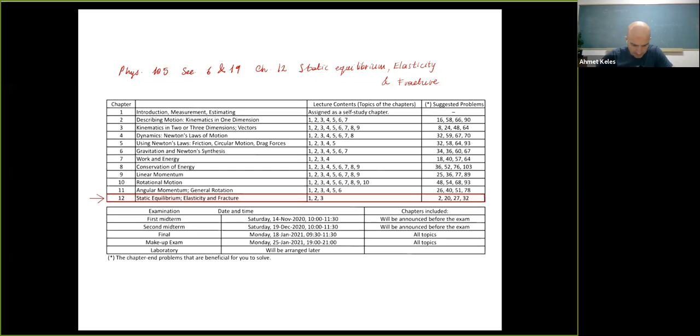First I want to introduce equilibrium, and when I say equilibrium, I mean static equilibrium. For this, we mean an object that is in a certain configuration and stays in that configuration no matter how long time passes. For this kind of static equilibrium, we have two conditions.

The first one is from Newton's laws: the sum of all forces on the body should be zero. Since force is a vector, we need to consider the sum of all forces in vectorial form. If you open this up, each component of the total force should be zero. For example, if you put your book on your table, the total force in any direction should be zero. Obviously there is no force horizontally, but vertically there's gravity, and if the total force is zero, there must be an equal and opposite force to cancel gravity - we know it is the normal force.

The second thing is, this condition itself is not sufficient for static equilibrium. Consider a situation like this: imagine you put your ruler on the table and pull it from opposite ends in opposite directions. It's easy to see the total force in the system is zero, this force cancels that force, but the ruler is not in static equilibrium because it's going to rotate. There is a torque, which brings us to our second condition.

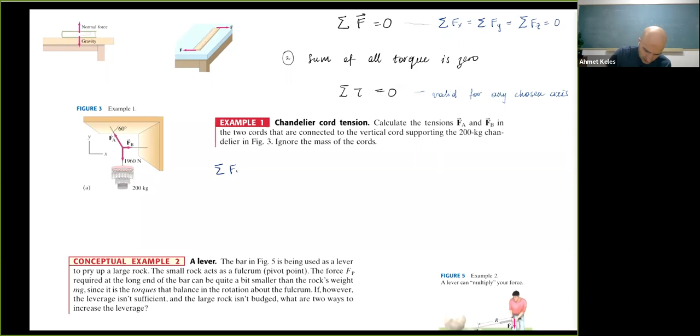The net force should be zero for static equilibrium. The net force in a horizontal direction should be zero, and the net force in horizontal and vertical directions should be zero separately. Let's start with the vertical direction. So the sum over all forces along y should be zero. I can decompose this vector into its components.

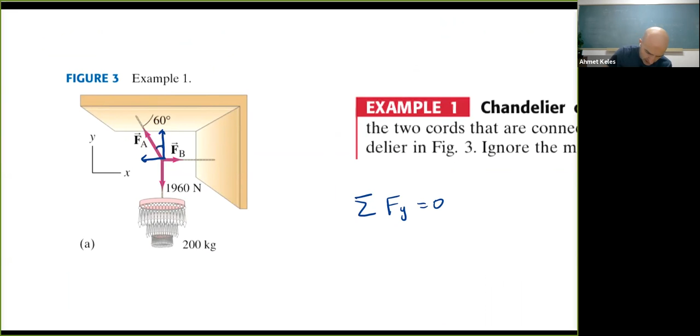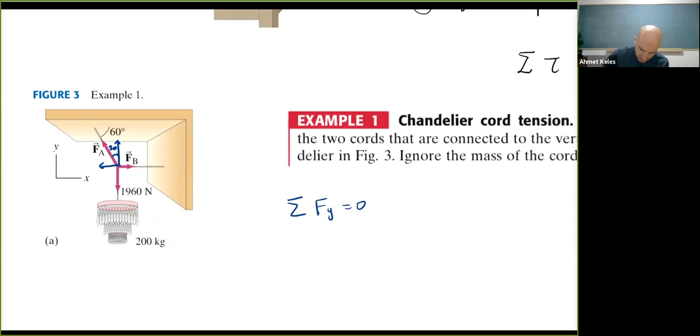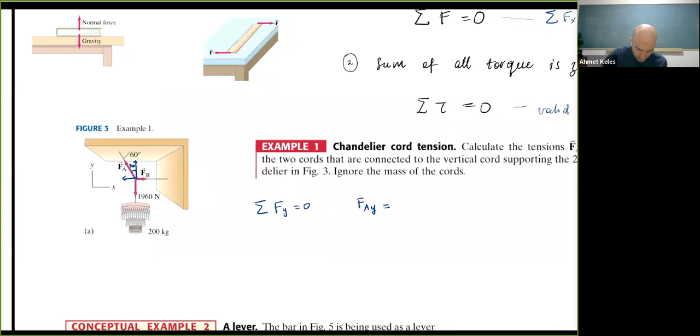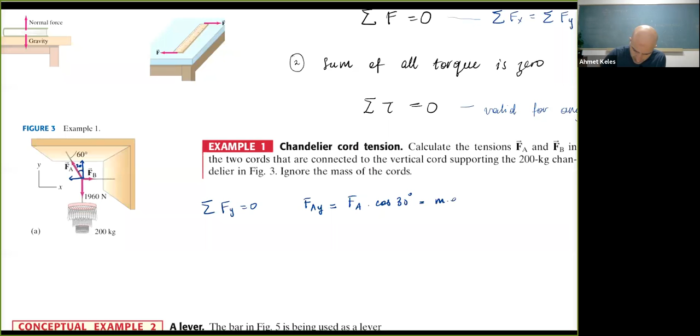This is nicely 30 degrees. From this figure, what I see is that for this to happen, the force FA, its y component, which equals the magnitude of FA times cosine 30 degrees, should be equal to mg. Then FA is equal to mg divided by cosine 30 degrees.

Let's calculate this. 2,263 - yes, I think somebody else got the same thing. 2,263 Newtons.

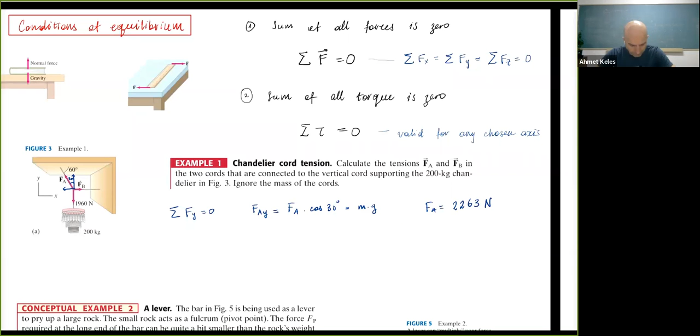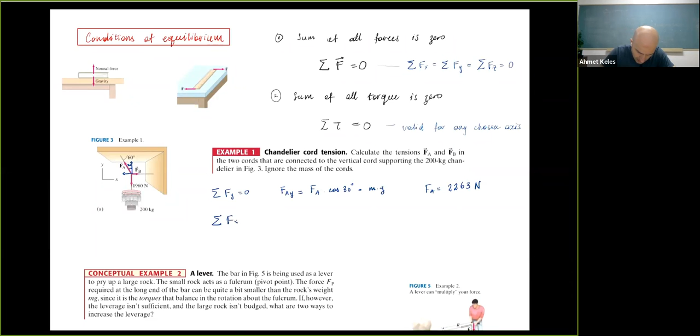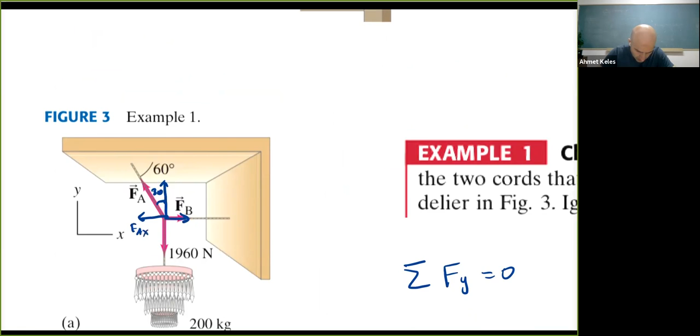Now this is only the first component. We also should do the same thing in the orthogonal direction, so fx should be zero. Along this direction, fb and the x-component of fa are the two forces. So fax should equal fb, which is fa times sine 30. This is a little easier, it's just half of that, which gives fb equal to about 1131.5 Newtons.

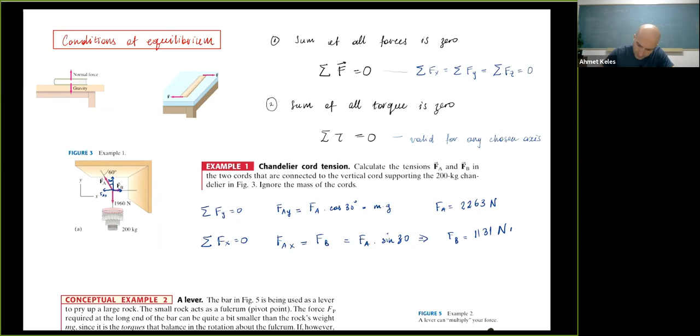Great. So let's talk about another example for the second condition. Here is a conceptual example from your book.

A bar in the figure is being used as a lever to pry up a large rock. The small rock acts as a fulcrum, a pivot point - there's a small rock, you may not be able to see it, but it's there. The force Fp required at the long end of the bar can be quite a bit smaller than the rock's weight, mg, since it is the torques that balance in the rotation about the fulcrum.

If, however, the leverage isn't sufficient and the large rock isn't budged, what are the two ways to increase the leverage? So you want to move this rock, and let's say in this configuration it's not working - what two things can you do? Decreasing R over R, yes. So I think the idea is simple, but let's just go over it: mg times R should be equal to Fp times R.

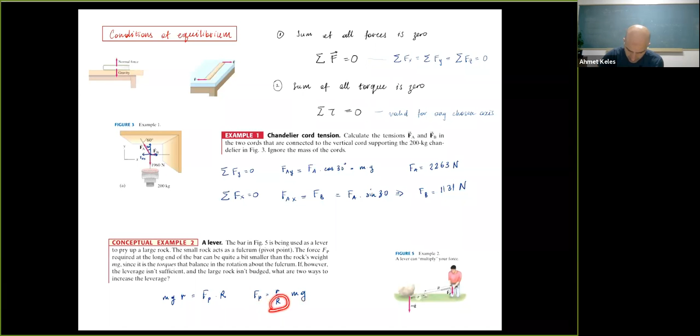You want to have Fp equal to r over R times mg. The idea is you need to decrease this r over R to have sufficient force to move this. One way is to increase R—in the picture they suggest connecting a pipe or some extension so you can increase R, which helps since R is increasing. Or you can decrease r by moving the fulcrum a little toward the big rock, which will also decrease r over R.

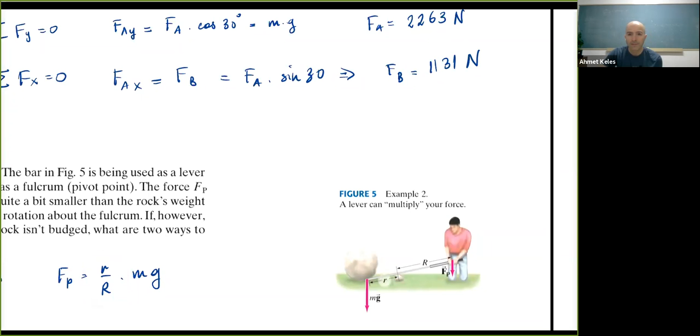Okay, let's move on.

A board of mass 2 kilogram serves as a seesaw for two children, as shown in this figure. Child A has a mass of 30 kilogram and sits 2.5 meters from the pivot point P, and his center of gravity is 2.5 meters from the pivot. At what distance x from the pivot must child B of mass 25 kilogram place herself to balance the seesaw? Assume the board is uniform and centered over the pivot.

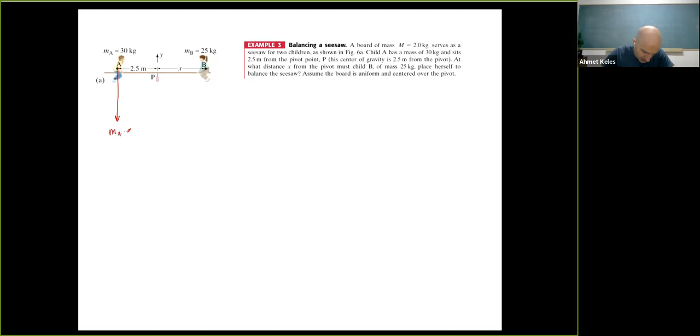So let's identify the forces. There's some force mA times g. There is some force mB times g. And there is some force from the board—let's call this M times G. For balance, there must be no rotation, and I choose my pivot point here.

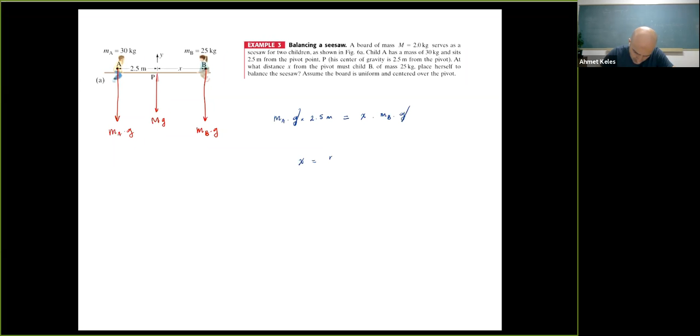So mA times G times 2.5 meters should be equal to X times mB times G. Then X should be equal to—I can cancel the G's—mA over mB times 2.5 meters, which equals about 3.0 meters. Simple.

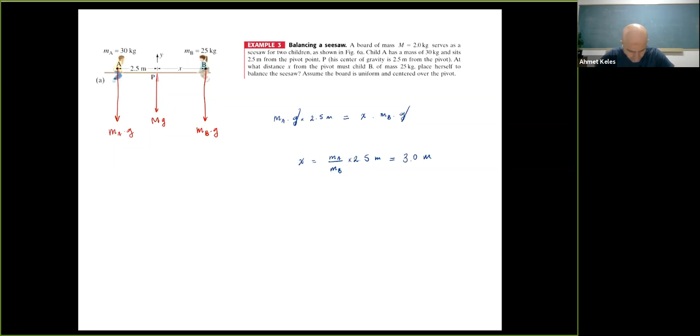Let's continue with another example I made up. Here's a cantilever, a device shown in this figure, with two supporting points here and here, and the center of gravity of this board is here.

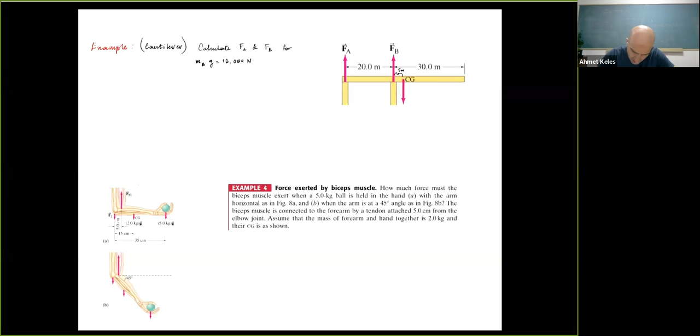The mass, or M board times G, is given to be 12,000 Newton, and we want to calculate FA and FB. The length is like 20, there's a 5 meter here, and this total distance is 30 meters.

We can start off by saying torque must be 0. There are two conditions: one is total force should be 0. Everything is in one direction, only vertical, so I'll just write magnitude.

So FA plus FB should be equal to M board times G.

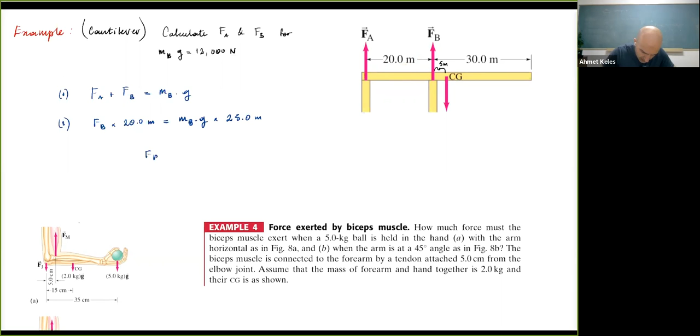The second condition is the total torque should be 0, and I want to choose this point. That means 2 FB times 20.0 meters should be equal to M board times G times, 20 plus this little chunk, which is 25.0 meters. Then FB is equal to, let's calculate, 15,000 Newton.

This is 15,000 Newton. So now I can put this back in the other equation, just plug it in here. So FA is equal to MB times G minus FB, which is equal to minus 3,000 Newton.

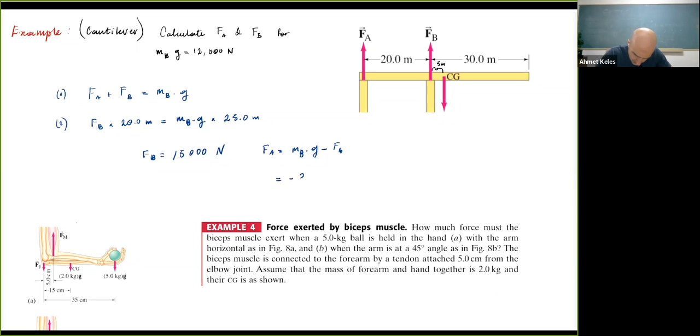Now, I found some minus here—what does this mean? Are we confused by this minus sign? Are we okay with this? Exactly—this just means our assumption about the direction was wrong. So force FA is actually in the opposite direction. From the figure it's not clear, but maybe it's glued, or there's some screw or nail, so the force is just pulling it down, which should be the case. Otherwise this thing would not balance.

So this will be a general thing: in problems concerning static equilibrium, if you find things like this, you just reverse the direction of your force and you're good to go.

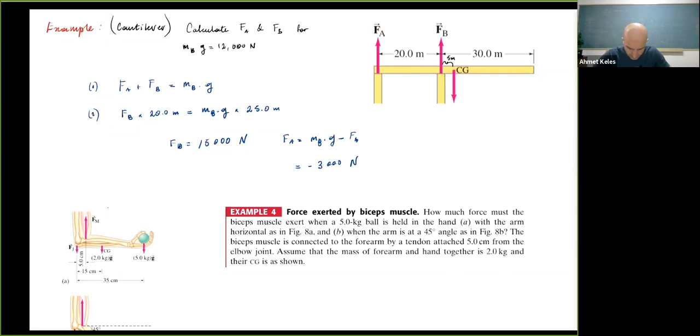Here's another example. How much force must the biceps muscle exert when a 5 kilogram ball is held in the hand, with the arm horizontal as in figure 8A, and when the arm is at a 45-degree angle as in figure 8B? The biceps muscle is connected to the forearm by a tendon attached 5 centimeters from the elbow joint. Assume the mass of the forearm and hand together is 2.0 kg, and their center of gravity is as shown, 15 centimeters away.

I think this is the same type of problem, so I'll go ahead and start. I'll look at the torque with respect to this point. If you draw a line from this point that goes through all the other forces, you can see all forces are perpendicular because the forearm is perpendicular. So let's do this.

Fm times the distance, 5.0 centimeters—I'm choosing centimeters here, so I should be consistent in the rest—minus 2.0 kg times 15 centimeters, minus 5.0 times 9.8 times 35 centimeters, should be 0.

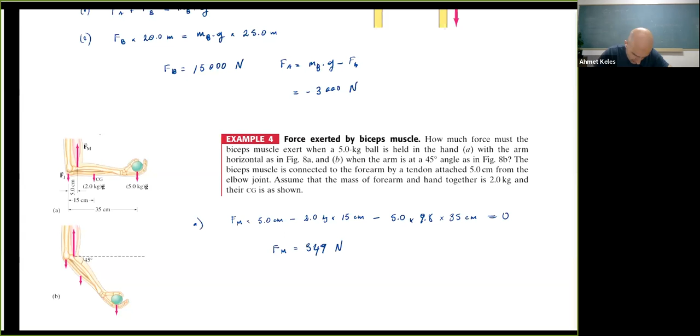So this was A, and B. So B, when the arm is at a 45-degree angle, I'll just do the same thing here. But this time, the torque will be the distance times the perpendicular component of each force, but this is 45, so the perpendicular component is sine or cosine 45 - doesn't matter. This guy, and this guy. So Fm times 5.0 centimeters times - let's be precise - this is also 45, this is also 45.

So this one will be cosine 45 degrees minus 2.0 kg times 15 centimeters times, this guy, this is 45, cosine 45 degrees minus 5.0 times 9.8 - there's a 9.8 here. I messed up. This one should be 9.8. So let me first fix that. It's clear. 401.8. Thank you.

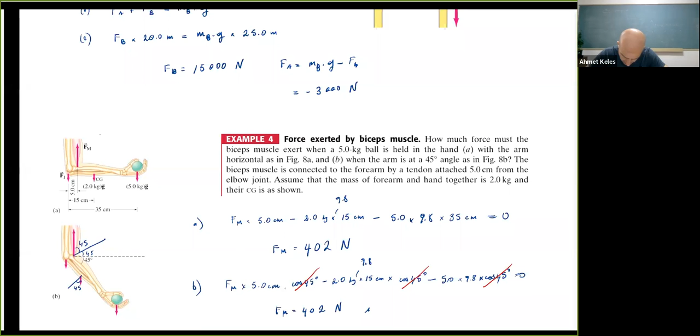402 Newton, right? Thanks for fixing this, good catch. So this one is also 9.8, so this thing should be 0. Let me not go ahead of myself. So times cosine 45 degrees should be 0. If I look at this, all these cosines cancel, so it's actually the same equation. So Fm is equal to 402 Newton, the same.

Okay, another example. So a uniform beam, 2.20 meters long with mass m equal to 25.0 kg, is mounted by a small hinge on a wall as shown in this figure here. The beam is held in a horizontal position by a cable that makes an angle theta equal to 30.0 degrees. The beam supports a sign of mass m equal to 28.0 kg suspended from its end, like here.

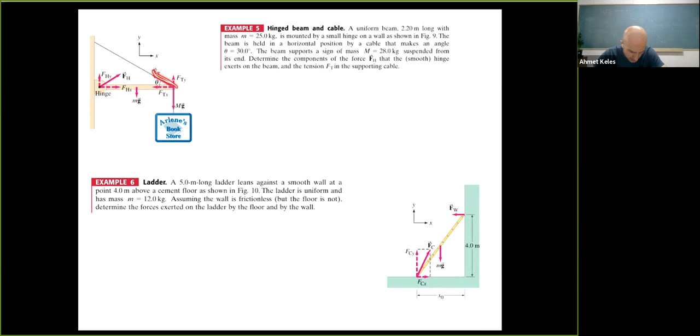Determine the components of force Fh that the smooth hinge exerts on the beam and the tension FT in the supporting cable. I guess this force and this force. Net torque and net force are both 0, yes. So how can I start? What's a reasonable route for me to find this with minimal effort?

Since we know M and M, we can find FTY, yes, so I see. You suggest I can start from this guy, right? Okay, let me start. And I believe you mean a calculation of torque with respect to this hinge. And so there's mg, there's another mg, and there's ft, and there's nothing else, right?

So let's do this. Total torque is 0. And from this, let's call this L over 2, then mg times L over 2 plus mg times L should be equal to ft times L times sine theta. Right?

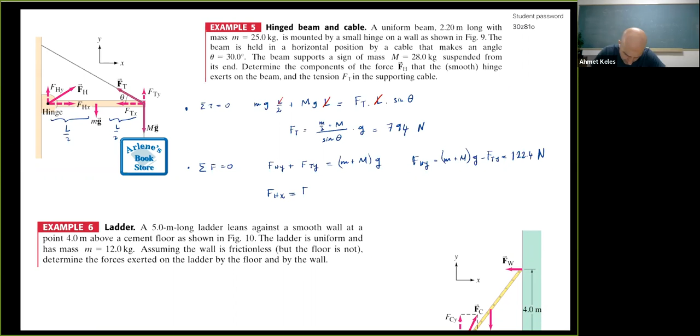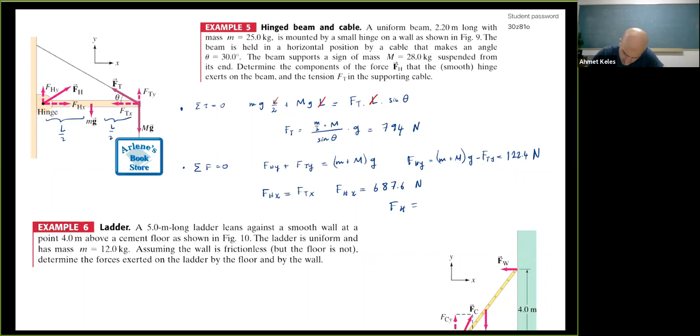And so in the horizontal direction, there's only this force and this force. So maybe FHX should be equal to FTX, then FHX is equal to, what is it, FT times cosine, 687.6. 687.6 Newton. Now I can calculate FH from the Pythagorean theorem. It should be equal to 698.4, 698.4 Newton. So let's go to the next problem.

So a 5-meter long ladder leans against a smooth wall at a point 4.0 meters above a cement floor, as shown in figure 10. So this is 4 and this is 5. The ladder is uniform and has a mass m equal to 12.0 kg. Assuming the wall is frictionless, but the floor is not - so there's no friction here, but there's some here - determine the forces exerted on the ladder by the floor and by the wall. We want to find this force and this force.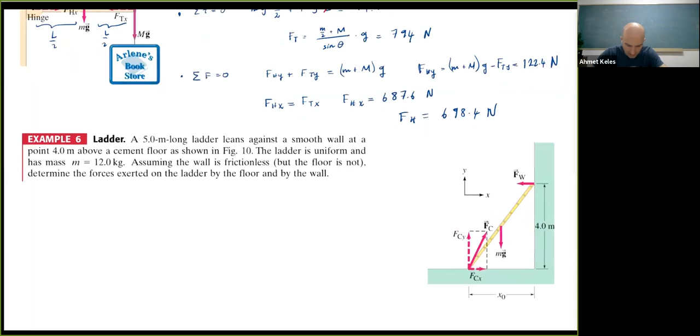How should I start? Any suggestions for me? Fcy is equal to mg. Okay, that's good, so let me write this. So total force along y is equal to 0. And from here you are saying mg, or maybe I can write it the other way first. Fcy should be equal to mg, and this is equal to what? 12.0 times 9.8, which is equal to 117.6. 117.6 Newton.

What else? So I got this component.

I have two more components to calculate, this one and this one. Fcx is equal to Fw, yes. So let's write this one too. So the force along x is 0, then Fcx should be equal to Fw. That's good, but I don't know both of these, so if I can find one, I have the other.

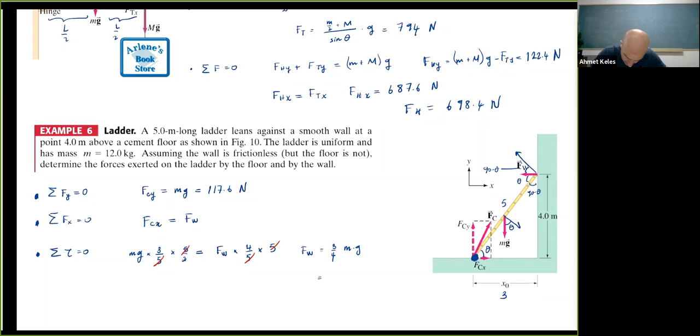So this is going to be sine theta, which is 4/5. I think this is times 5, right? I can cancel these, this guy, this guy, this guy, this guy. Now I have an expression for Fw, which is 3/4 m times g, which is equal to 88.2 Newton.

So if Fw is this, we know from this Fc of x is also 88.2 Newton. Then Fc is, we can also use the Pythagorean theorem to find what this is, but this is basically 88.2 times 88.2 plus 117.6 times 117.6. You found 44? Okay, then I messed up. Let's see where I messed up.

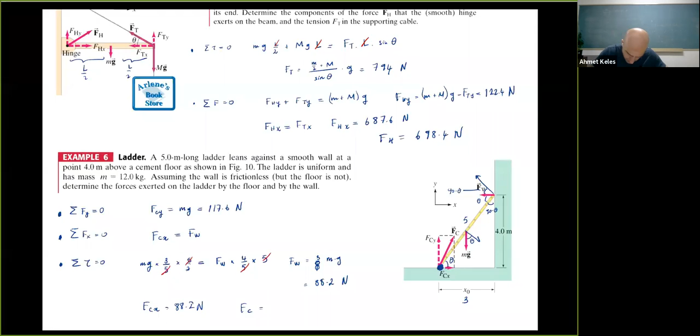Oh yes, I forgot this half. This half, right? Thank you. So this is actually 3/8. Okay, let's clean this up. So this is 3/8, this is 4, and this is 1. Thank you.

Yes, so now I can redo the other one. Okay, this is 44.1 Newton. Let's do this. Actually, let's call it 126. 126 Newton.

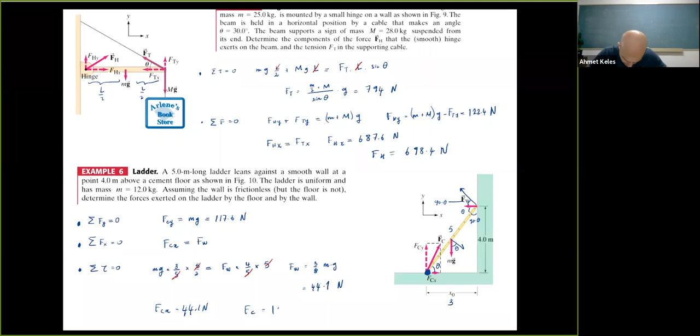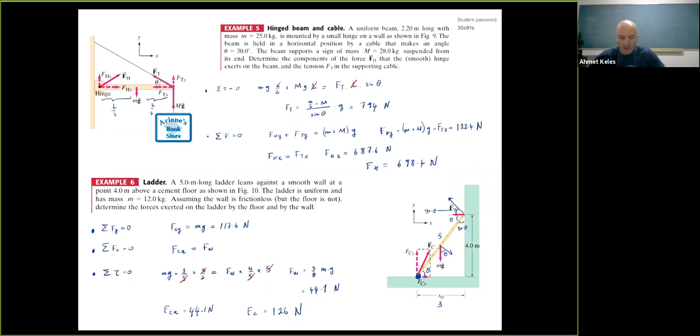So I think this is all, but I want to talk about the rest of the chapter just to expose you to some interesting stuff. All right, let's move on.

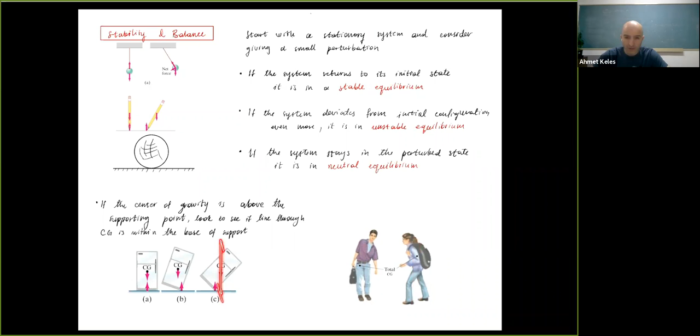So now I want to introduce some different concepts like elasticity, stress, and strain, I think, which can be interesting.

So in the previous weeks, we saw so-called Hooke's law. If you had a spring, the amount of stretch of the spring was proportional to the force. And there was this spring constant that determined the magnitude of force. And this law is actually valid not only for springs, but everything. So if you have some system, like a rod, and if you hang some mass, there will be some amount of stretch. And this stretch will follow Hooke's law to a certain extent.

But the amount of stretch is not only dependent on the force. So we can follow an intuitive argument to see all the parameters. First of all, you can tell this total stretch is proportional to total length, because if you have a longer rod, there will be a longer stretch. So it should be proportional to this total length, L naught. It should be inversely proportional to area, because if it's thicker, it will be harder to pull, so there will be less stretch. So this is inversely proportional to cross section. And from Hooke's law, it's of course proportional to force.

So these three things, and we put the proportionality constant in this form, which is kind of funny, but it is 1 over E. And this E we call the elastic or Young's modulus.

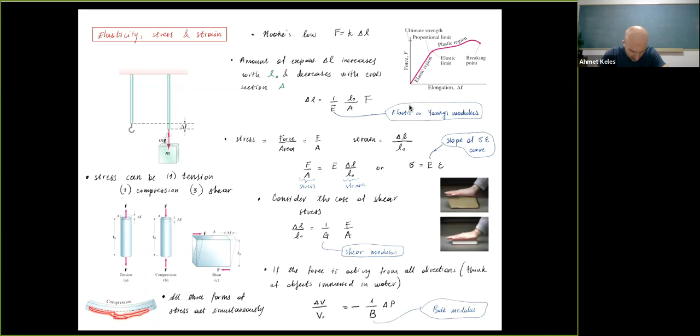So these forces, like compression, tension, shear, it's not one or the other. In real life they're all acting together hand in hand. If you deform some material like this, for example, one side is under tension because you're pulling and stretching it, whereas the other side is in compression. Let's look at some numbers.

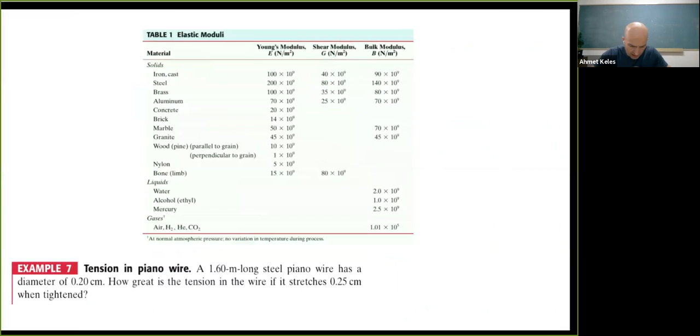Here, you just copy this table from your book, which I think is interesting. You can look at the Young modulus, shear modulus, and bulk modulus of different materials. For example, we can start with iron or cast iron. Its Young modulus is some big number. You can see its shear modulus is about half as big, whereas bulk modulus is almost the same. With iron or steel it's even better - Young modulus is twice as good, shear modulus is twice as good, bulk modulus is more than twice as good, almost twice as good.

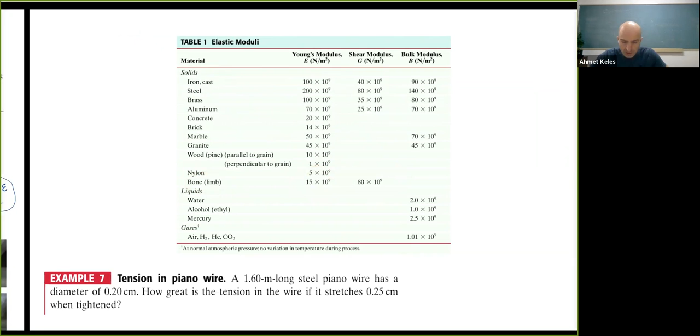So for brass, you can look at concrete. Young modulus is comparable to iron and steel, but it doesn't have much shear. If you have concrete and try to bend it, of course it's going to crack because concrete is not good for that kind of thing. You can look at bone, for example - it has a large Young modulus, and an even larger shear modulus, which is interesting, and so on. I'm not going to solve this problem, you can work it out for yourself later.

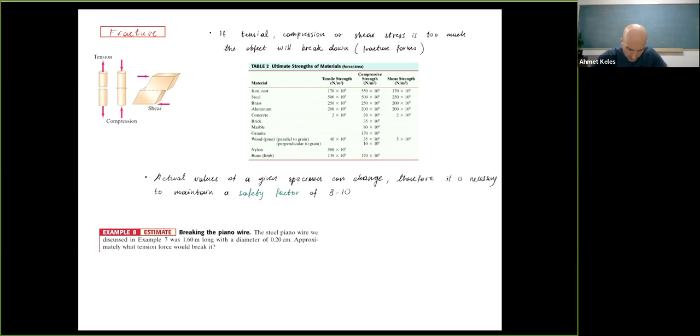So like I said, if you put too much stress in a material, you start forming so-called fractures. You just break it, and this breaking point is also characteristic of materials. Different materials break at different strengths, as we know from real life. So here I also copied the table - of course this is like a reference, not absolute values, but approximate values to give us an idea. This is the so-called ultimate strength of material: at what force per area is needed to break it, what kind of stress is needed to break the material. And of course the stress can be tensile, compressive, or shear strength.

Let's start with iron again. You can see it's on the same order, right? These are all maybe, compressive strength is more than 2 times better. But if you look at concrete, its tensile strength is hundreds of times less than iron, but its compressive strength is not as bad - compressive strength is 10 times better than its tensile strength, and its shear stress is also pretty bad. So for concrete, you better not try to put these horizontal columns in your ceilings, because that's actually not as good. Or like brick.

So wood - you can see wood's tensile strength and compressive strength are pretty much the same, but its shear stress is also pretty bad. It's actually better than concrete, but its tensile and compressive strength is better than its shear stress. So I think wood is probably better to build something like a roof, for example.

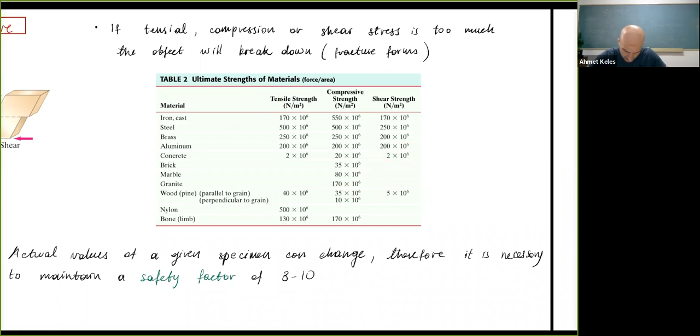Generally, there's something called a safety factor. When engineers design some structure, they take these reference points and apply a safety factor. This means they try to build it, let's say, 10 times stronger than its reference strength, so that its safety factor is like 10.

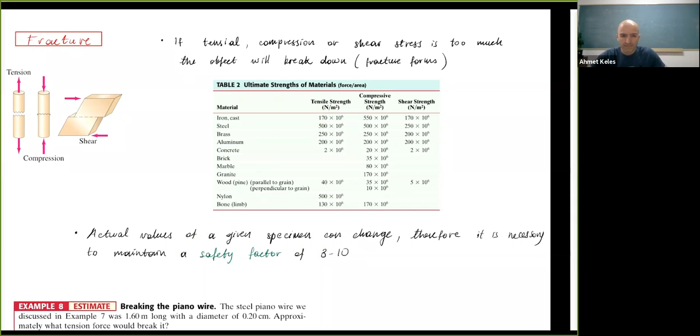So maybe I can give you an example and we'll finish here. Here is a conceptual example from your book, I think, which is interesting. Two walkways, one above the other, are suspended from vertical rods attached to the ceiling of a high hotel lobby, as in this figure.

You have some rod, you have some bridge going through. The original design called for a single rod of 14 meters long, like this. But when such long rods proved to be unwieldy to install, it was decided to replace each long rod with two shorter ones, as shown here.

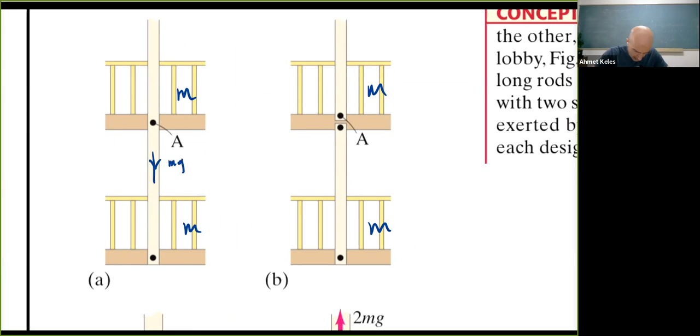So maybe I can start from here. There is some tension here, which is what? It's like mg because of this guy. Whereas here it is 2mg, right? Because you have this and this, 2mg.

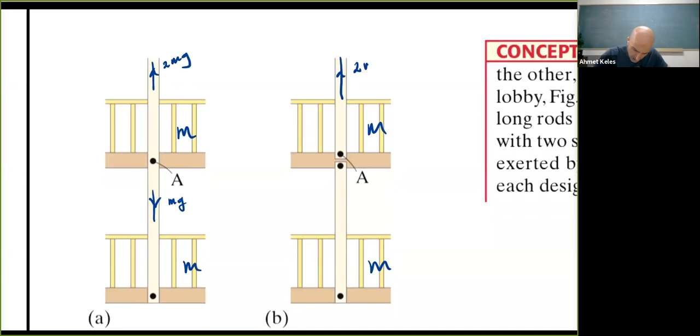So on this figure, I have what? It's like 2mg the same. This is also mg the same. But the point is, this mg has no effect on this pin. But this pin is also in contact with the bridge, right? With this guy and this guy. So there's also this force from the bridge, like here, which is mg.

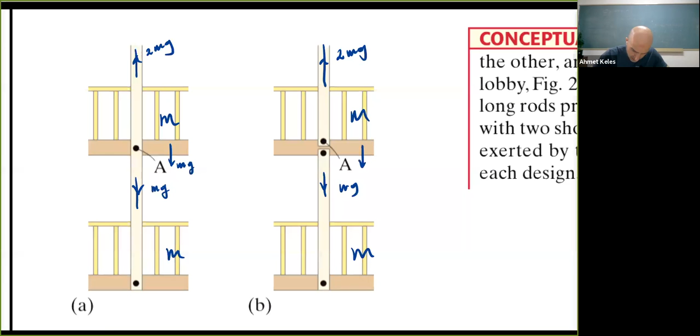And here, this is also mg. But in this case, since the bridge is connected to a mass of 2mg, right? If you look at here, this whole thing is hanging on the bridge. This is actually 2mg pulling down. So maybe I can write it like this.

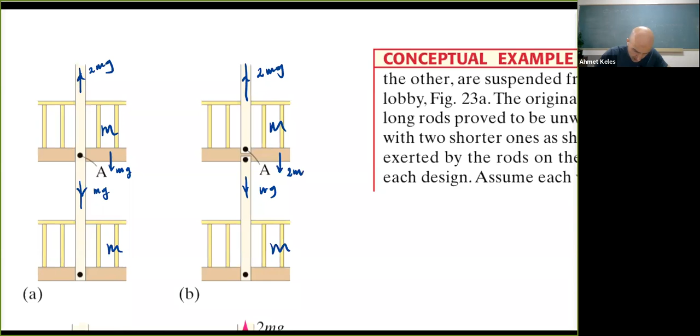Let's identify all forces on the pins like this. This is the first one, this is the second one. The first one has like what? So the total force coming from the rod is 2mg up, 1mg down. So it's in total something like this, mg, and this is coming from the rod. And there is also force coming from the bridge, which is mg. This is from the bridge, if you like, top bridge.

So in the second case, let's pull this guy a little bit to here. Now I have still 2mg here. So this is from top part of rod. And there's some force down, pulling this pin down here. So there's like some mg from this bridge, but this mg also is acting on the same pin. So here is 2mg from the bridges.

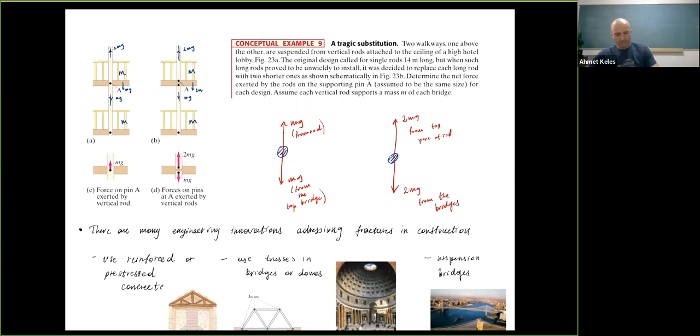So what I see here, this different design. The first design has like some mg stress on this pin, but the second design has twice as much stress as the first one. So if your pin is weak, actually, this second design is more dangerous. And what is interesting is, I think something like this actually happened in the 1980s in a hotel in Kansas. So they decided to switch from this design to this design, and the bridge failed. I think over 100 people died. It's some simple mistake like this.

So I want to finish with, these things are actually like an engineering problem, right? How to design all these things, considering stress, strain, and shear, and material properties, and there are different approaches. One approach is using reinforced concrete. So if you want to build an engineering structure that is more durable, you can reinforce the material with some irons. I think we are familiar with this. And what is interesting is you can actually pre-stress the iron before you put it in your cement, and that seems to increase its durability.

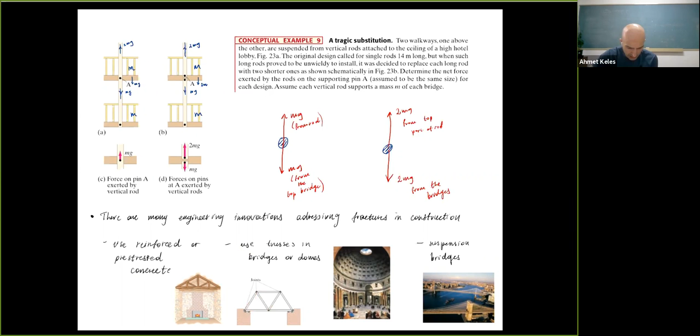So sometimes maybe you see bridges like this in this structure, right? This is called truss, the use of trusses in bridges. Or you can actually see it in some cabins too. If you look carefully, you can see these triangles in this structure like this, like this. And the idea is this kind of structure is more durable under shear stress, because if you have a square, of course it can deform to some shape, but a triangle is more durable for that.

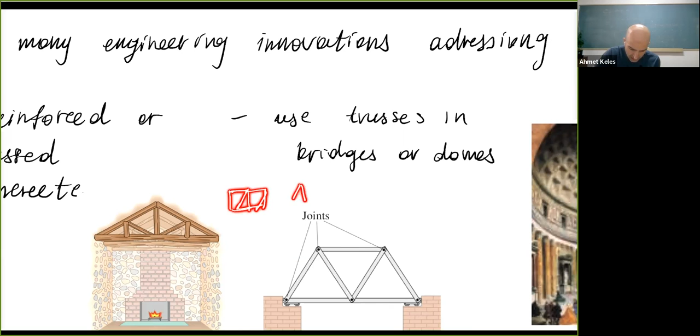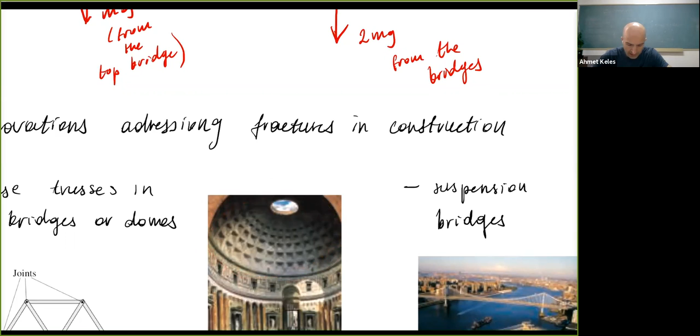Another thing is domes. Domes are interesting because the concrete, as I showed you, is not good for shear. If you try to bend a concrete, it breaks. And it's not good for tensile stress either, it's only good for compressive strength. And what domes are doing is actually changing the architecture so that you mostly have compressive stress on the concrete. Thanks to this special design, they are more durable. After thousands of years, these structures are still alive with this smart engineering design.

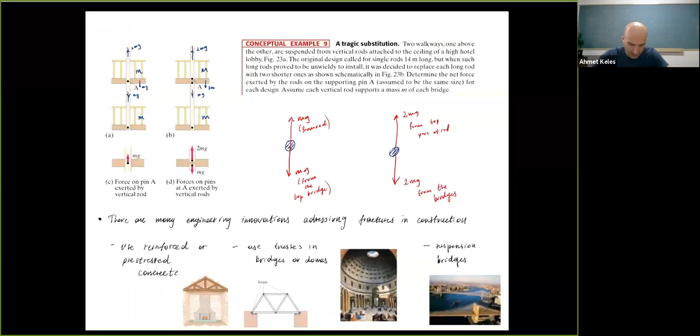Or finally, you can use a completely different approach and go with the suspension bridges if you like. So anyways, I think these are interesting. You can take a look if you are interested.